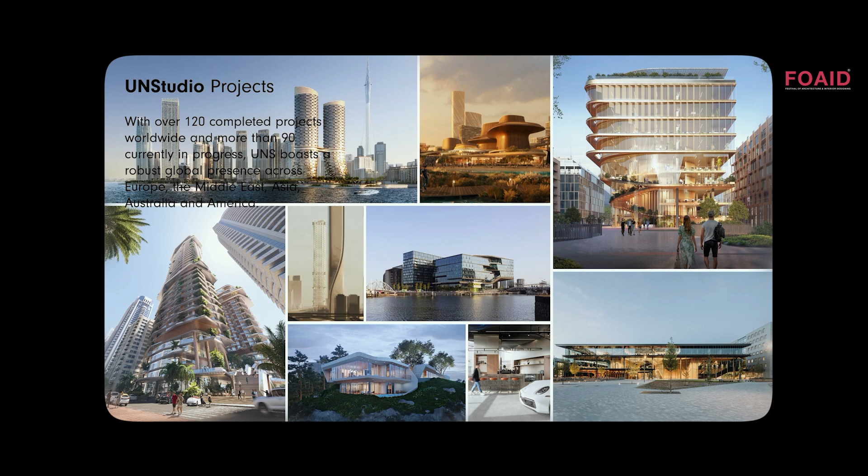We've done a lot of projects all across the world: 120 completed projects and 90 still in the design process or under construction. If you look very quickly, we've only done 4 in India. We hope, of course, that we can do more and collaborate also on the growing cities here, and on the questions which are arising from that.

I think it's good to stand still a little bit on what we think of as values, right? We don't do design for design purpose only. We really think that we carry in our projects, and we have to carry in our projects, our values. First of all, we think that design is about people. And that means for people in different cultures, in different climates, in different environments, that relates really also to the planet itself. So from very desert kind of areas to making a place which is livable for people.

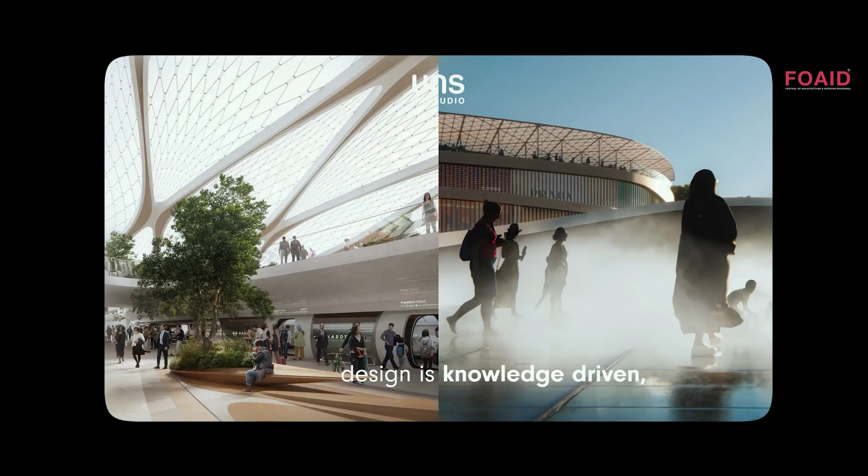Mind you, these 2 images are basically the same location. The right-hand side is, of course, not realized yet, but this is the ambition which we have. We believe that design is knowledge-driven, so that we don't design only the aesthetics, but we really think about what the impact is on the world. On the left-hand side, that's a hyperloop, so we think about the mobility of the future. And on the right-hand side, how do we entertain people, and how can we keep people outside longer - this is actually in the UAE - to extend the winter in the desert areas.

We do that on all scales, from small interventions to cities within cities. On the left-hand side is the Amsterdam project, a very high-end shopping street in Amsterdam with all these old houses which we know from Amsterdam. We were asked to do a small intervention, and we kept it very, very minimal to the detail, so we were very focused during this project on the detailing of this facade. On the other hand, we also do master planning and huge developments, like the one in Frankfurt, which is under construction and almost completed.

And that is on a site which used to be the Deutsche Bank. We wanted to give that back to the city, because it has been closed off for so many years. So now it becomes a kind of center of Frankfurt, where people can just enjoy the city.

We do that on cultural icons, and we question the infrastructure of the future, where cable cars could be a solution for how we can travel on a consistent basis through the city, avoiding traffic. An interesting fact: cable cars are almost like a constant conveyor belt, so people don't really have to wait, it just continues. You can get in, you can get off, and you just go over all the traffic.

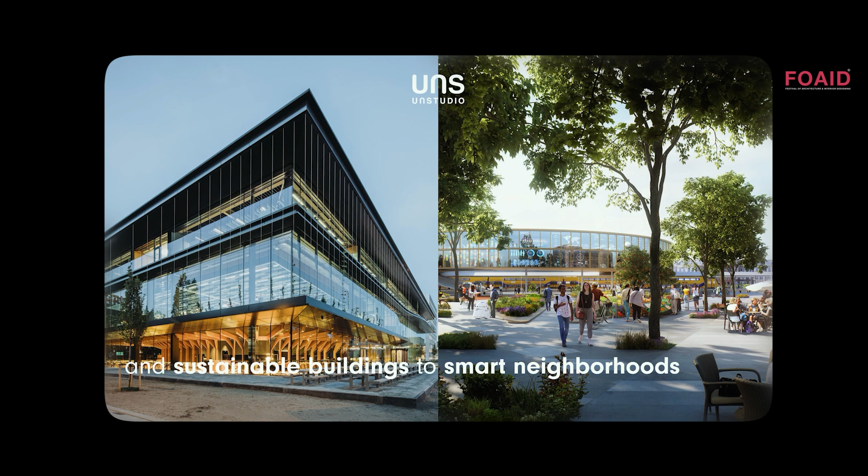We focus very much on sustainability and smart neighborhoods, so we really focus on technology. Interesting fact, the left-hand side image is from my university where I studied in Delft. We designed an inter-faculty building where students can collaborate, so an engineering student together with an architecture student or an aerospace student can come together and share ideas. So the architecture becomes way more than just a building. It becomes a place where people meet, collaborate, and learn from each other.

This building specifically is also very sustainable. It produces more energy itself than it needs, so it could give that back as well. So we create social sustainability as well as environmental sustainability.

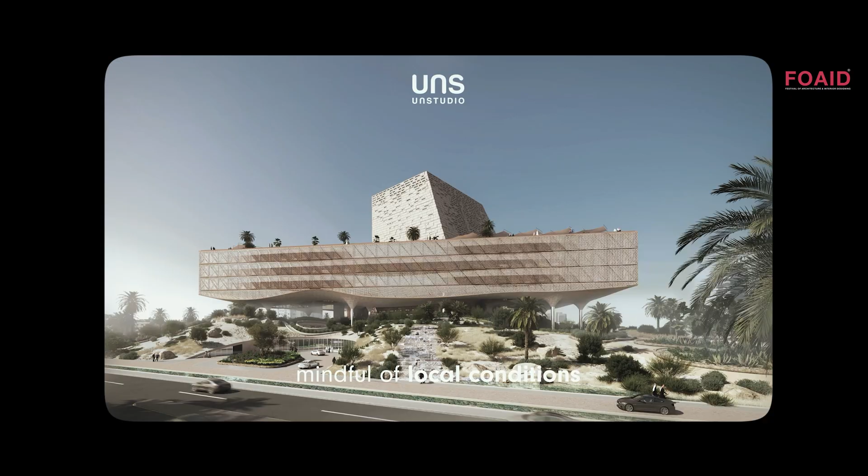We do that with always being mindful of local conditions. That means a building which we design for London is very different than a building which we design in Jeddah. So we make use of the local flora and fauna, and we try to make the environment more pleasant, so you can get under the building into the shade and really extend this 'winter,' which is super important if you live in the Middle East and have experienced the UAE in summer. You really welcome these kind of initiatives.

Obviously, we create meaningful places. I think that's a very important message for us, that we don't say we create meaningful architecture, but we create meaningful places, because that's where we live. We don't live in architecture, we live in places. We entertain in places, we work in places.

Now, getting to the subject. Like I ended, I think we talk about space and how can we make that inclusive, so where everyone's needs and desires are met, and how we as architects, urban planners and designers can make that happen. So we're trying to look for this balancing of the needs of people, neighborhoods, and the environment. We approach the design as community making, and also this future thinking. We cannot predict the future, but we can think the way we foresee the future, and be flexible with it.

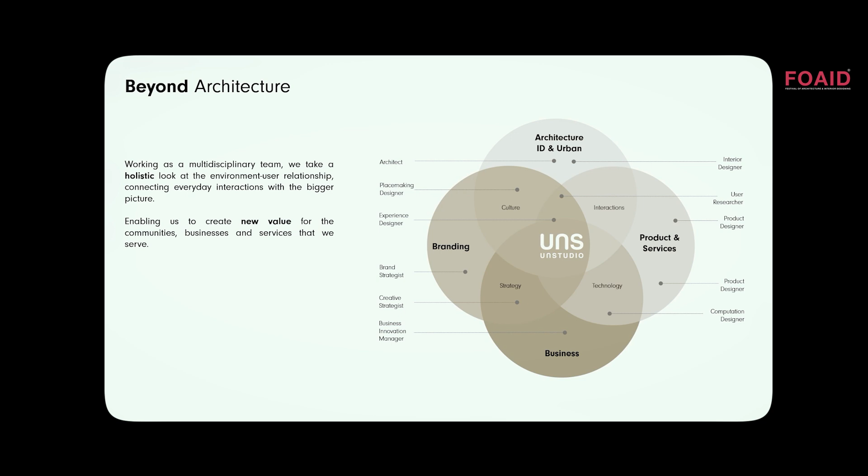And of course, on the side, we do some branding, products and services where we can implement very user-specific and end-user-specific products in our projects as well.

So by exploring how people live, work, move, and interact with communities, nature, and space, we explore how to create these environments and enhance this human experience. We want the end result to always bring people together in their way of living, their way of working, and their way of entertaining.

So I want to show a couple of projects which show not all the elements in every project, but at certain levels in different projects.

I want to start with a project we recently did in Dubai, a very commercially driven development, a high efficiency tower with an ambitious brief inspired by the coral reef. We were inspired by the aesthetics of it, but also the brief in terms of views.

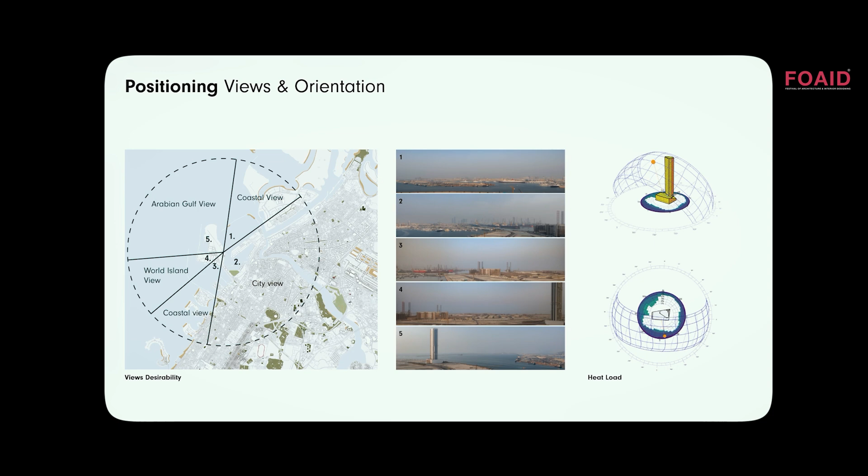This is in the Dubai Maritime City, where on one side it's very industrial, with big ships, containers, and warehouses, and on the other hand, there are beautiful views back to the city and the Arabian Gulf.

So we looked at this from different perspectives: the site itself at a micro level, and also how it's exposed to the sun during the day, and how we could combine those.

We looked at the urban envelope we got, which was just a standard floor plate, basically a podium with a tower on top, a very normal and standard approach to residential.

We focused immediately on the views, since that was the main driver for the developer. We thought, why don't we rotate this building and push the core even further back, so we could really focus on one side, which basically sells the project. That worked out perfectly, because we were then able to put the core on the southern side of the facade, which has the largest heat load.

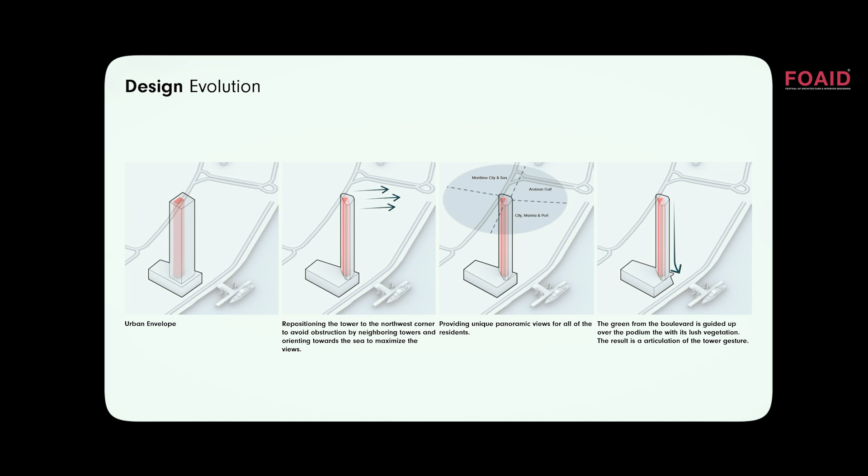We wanted to do a little more with that, where we could use that core to heat water, or even cool water as well. However, the client didn't see the purpose in that, unfortunately. But these kinds of things we always try to introduce, at least.

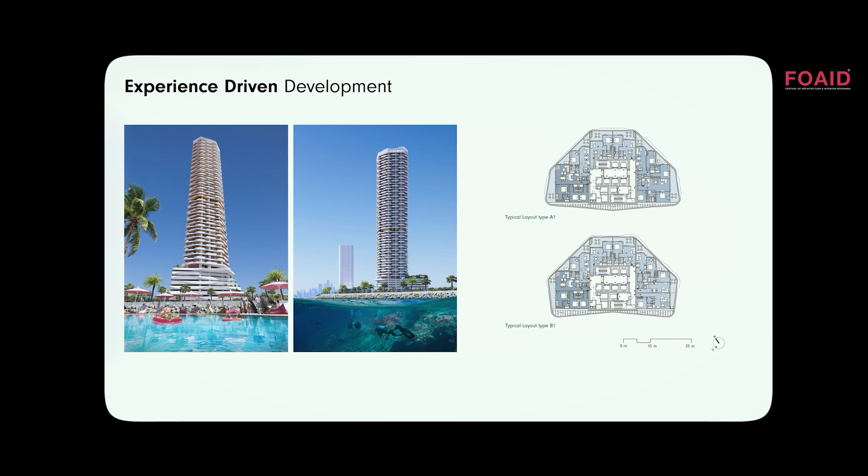And that ended up into a tower which is standing tall. We tried to incorporate the podium as well into the whole design, and as you can see, it's really inspired by coral. You can see in the floor plans that all the living rooms have these beautiful views, while the bedrooms basically turn their back to the more industrial area. Like I said, it was inspired by coral, so it's a kind of natural inspiration.

How did we create this vividness on the facade? It's a very simple A-B approach, an iteration of the A floor and then the B floor, which gives you these double height balconies. So you always have air above you, instead of continuous balconies on every floor.

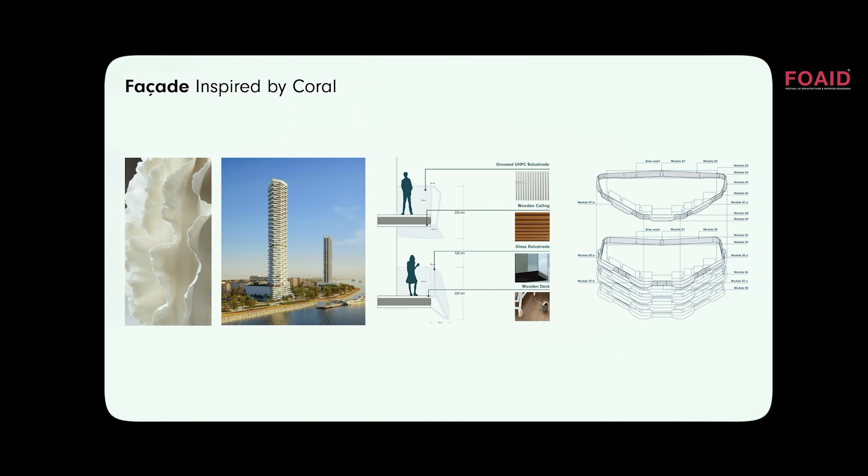Continuing, I think this is one of our projects which is really highly anticipated. It's going on site, hopefully. It's in Melbourne, and this is truly an extension of the urban environment and the public realm. This is Southbank by Beulah in Melbourne.

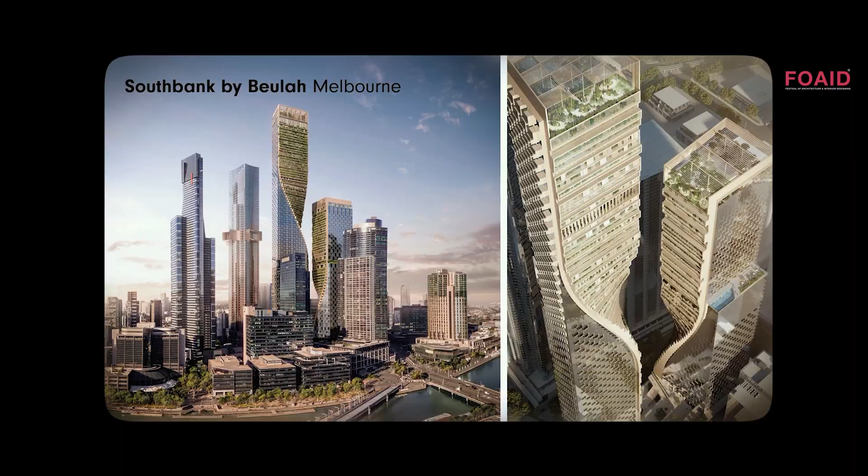We were invited for a competition a couple of years ago to design one tower in Melbourne. It was a big competition with all the big names, and we basically challenged the brief. We said, what if we do two towers instead, you open it up a little bit and they can talk to each other, becoming part of the urban fabric, because you see all these towers with a smaller footprint, and you don't want to create a wall in the city center.

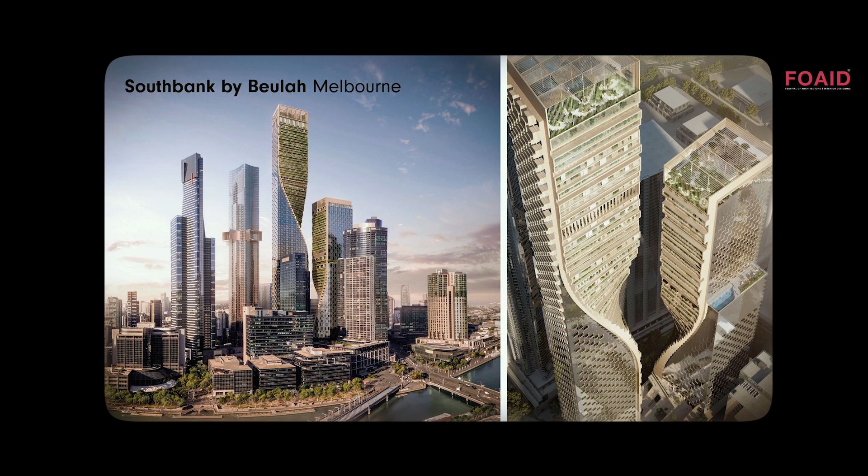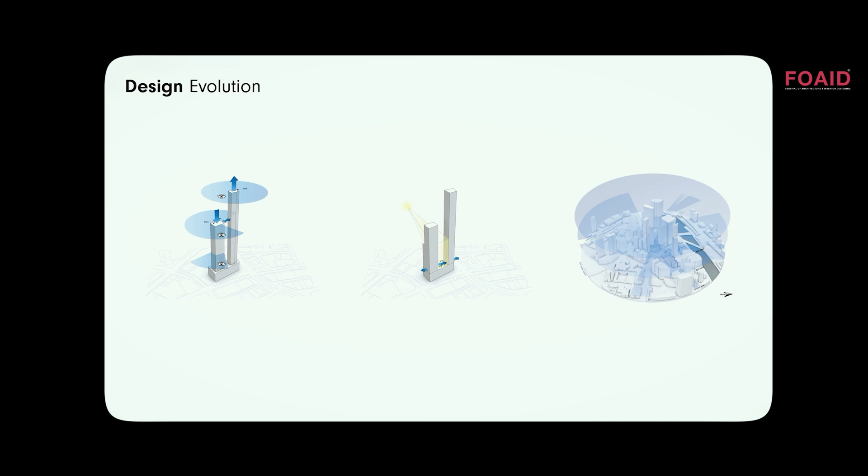So that's actually the first thing we did, analyzing where it's positioned in the city. We focused again on views, sunlight, and how to position it in the city, and how to connect it with the city.

In Melbourne, you have this public realm, a green route through the city connected with different public spaces, communal spaces, bars, restaurants, etc. How can we incorporate that building into that routing and become part of it, so it doesn't stop where you enter the building? That inspired this twist as well, this green spine, and it opened things up a little more, creating a kind of urban podium in the middle. I think this short video really shows what we mean with that, the extension of the green, literally the growing of the green in the city.

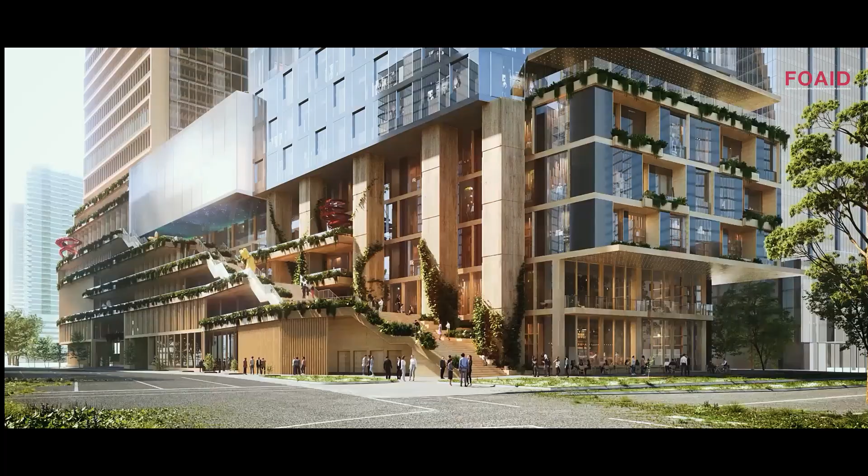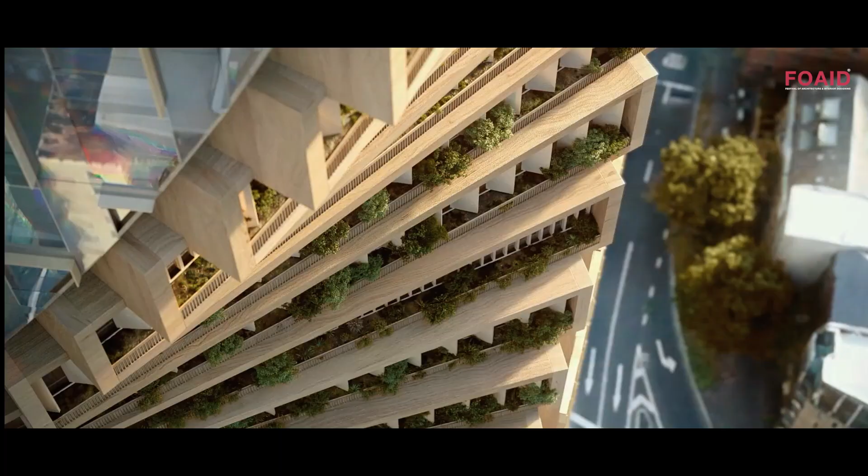So here you can see it's very close to this park, close to the river, and it's really trying to introduce the green spine into the city. Biophilic design is super important, so this whole twist is the green spine, where we try to incorporate a lot of planting, but also the balconies themselves. They're actually loggias, which provide shading for every single apartment, office, or hotel room behind.

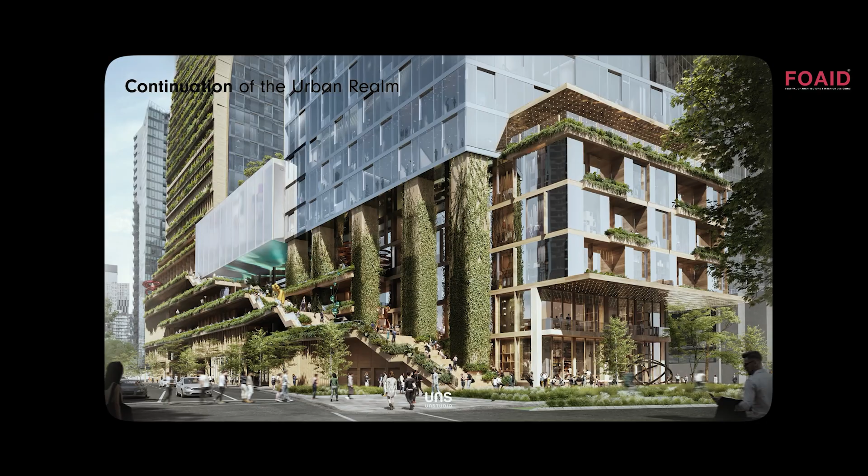So this is kind of the end result. What's interesting is that Centre Pompidou, the museum in Paris, picked this up, how it's really incorporated into the city. That white box there is most likely going to be a museum, so that's almost the highest level you can reach in communal and public space, where we actually show stuff to the city.

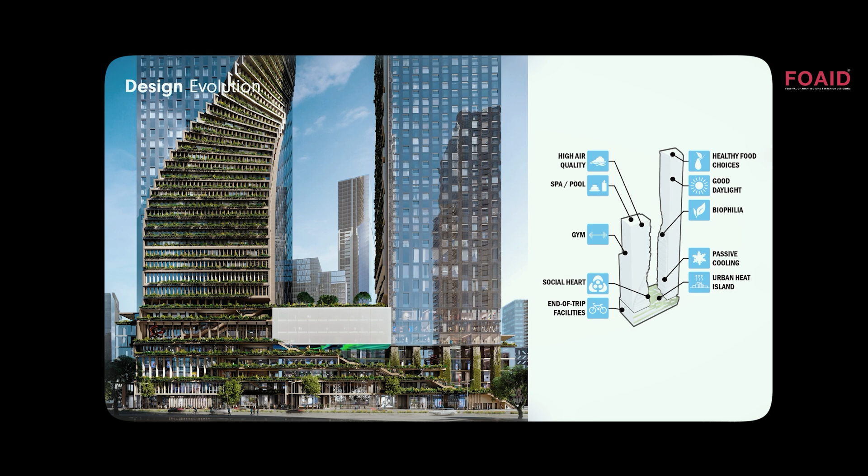Just a few more images to show how this dynamic facade works. It's not like a boring high-rise. It really plays with the different facades, and how it also plays with different elements to introduce environmentally friendly aspects.

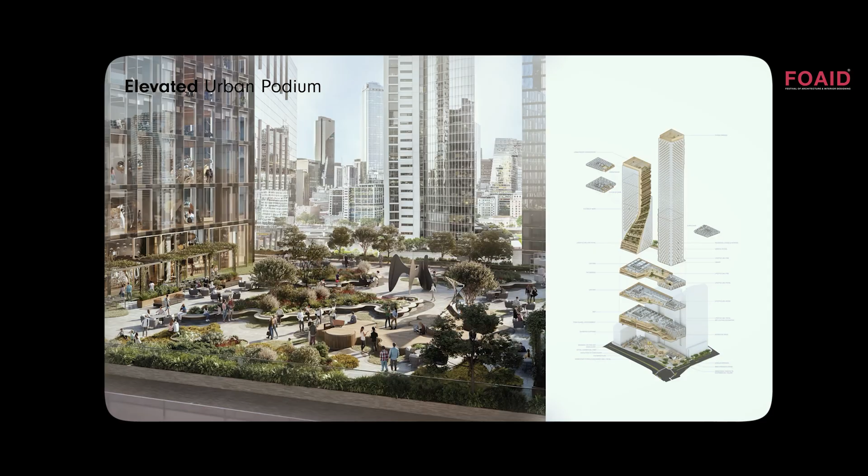Like I said about the urban podium, you create this kind of podium where people can interact and go, and it becomes really like a plaza, as any plaza within the city, only one with a really fantastic view. And we create exquisite experiences. There's going to be a hotel in this building alongside residential offices, so it's going to be a city within a city.

This video is a little bit longer, but it really shows the positioning in the city and how it works with this specific city.

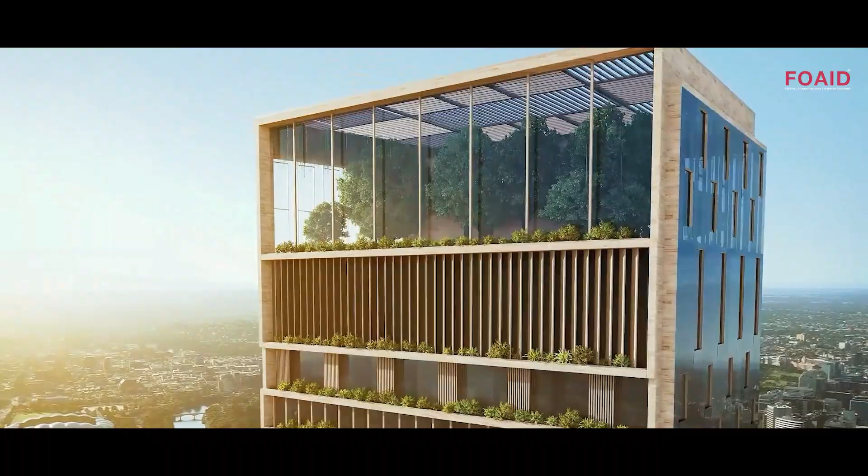As you can see at the top floor, at the roof, we're trying to create this forest. Of course, that comes with a lot of technical challenges. What we've learned is that if you want to make a biophilic facade, you start with very small plants, because they can adapt. If you grow them on the ground floor in a nursery, then plant them at 100 or 200 meters high, it doesn't really work, and it takes a lot more care. So if you already plant them at this height, they get used to it.

I don't know how many times I've seen this video, but it's still amazing, if this gets built in a couple of years, because it will be such an addition and such a new way of thinking about high-rise, and how can we give this back to the city? How can we really make a city livable again, even though it's a very dense place to live? I think we all recognize that in cities like Mumbai as well.

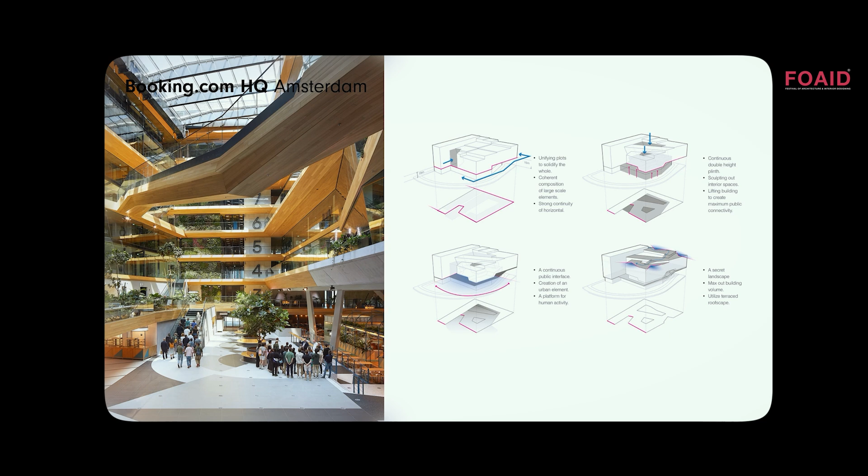What was interesting, I visited obviously, and we walked in and I was like, wow, this is such a big building, especially on the scale of Amsterdam. At a certain point we were on the roof and I said, how did we get here? We didn't take a lift.

It was just like climbing a small hill, let's say. You walk through the city, you have all these experiences. You walk through the restaurant, you grab a bite. There were people meeting, people working, some people just playing a game even in the office. So how can we change this way of working? Work is a social place as well. We spend so much time in our office, how can we make that also a pleasant time?

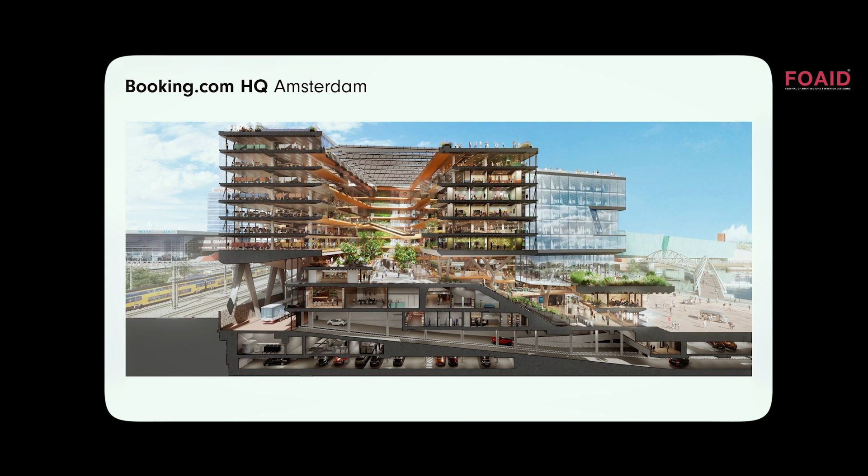This is a section where it actually really shows that it's an extension of the city, with a lot of green, walking paths, big balconies, so that people can really get out of their office space.

And I think it's best shown with a video like this. This was a little excursion into the office. This is Amsterdam on a good day - it's quite often raining.

So this is basically your entrance into the building. It doesn't feel like an office, it feels like an open lobby space. There's a lot of green introduced, very warm tones, wood, timber.

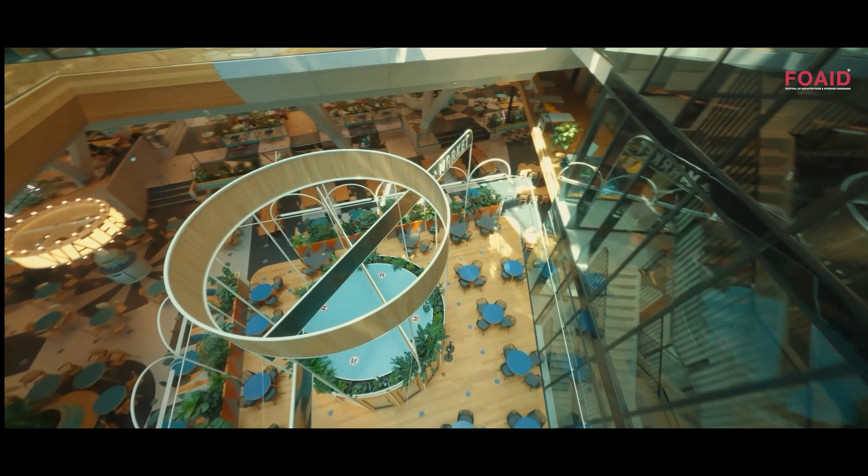So can you imagine working here on a daily basis? Good restaurants. And it's these moments, especially in these technology-driven companies, where the biggest ideas happen and people interact - not when they're behind their laptop writing emails or writing reports.

It's also very special - we looked really into the air quality of this building. There are very special kinds of ways of treating the air from either the floor or the ceiling, which gives you this really purified air almost. So the environment not only looks good, it is also good for you.

This is the rooftop I talked about, and here you can see really, really good the scale of this building. Especially in a city like Amsterdam, where everything is very, very small scale, it's quite interesting how it blends in.

Yet another project - I think this really wants to address the fact that we don't only focus on design. We developed an urban branding manual. We did it for two projects so far.

We did it once in Qatar for the metro network, where we really made a branding manual of how to build a metro station on different scales. We did that because there were 36 stations, I believe, and these were all going to be built by different contractors. So how can you maintain the quality? Well, make a manual - and it's not guidelines, it's literally a manual which has to be followed.

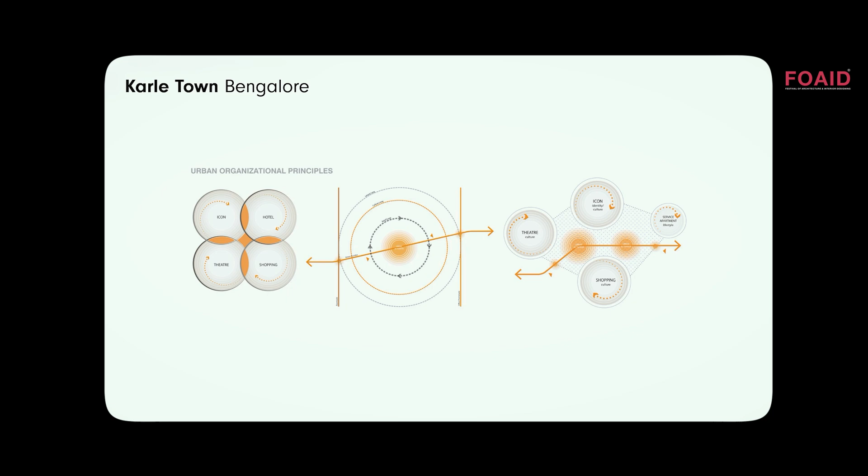The health aspect, or how we connect all these buildings together, isn't about separate elements. We try to create a field almost, where you interact as a human being with those buildings and your environment, having a pleasant environment. We want to avoid people clocking out at 6 o'clock and going straight into traffic.

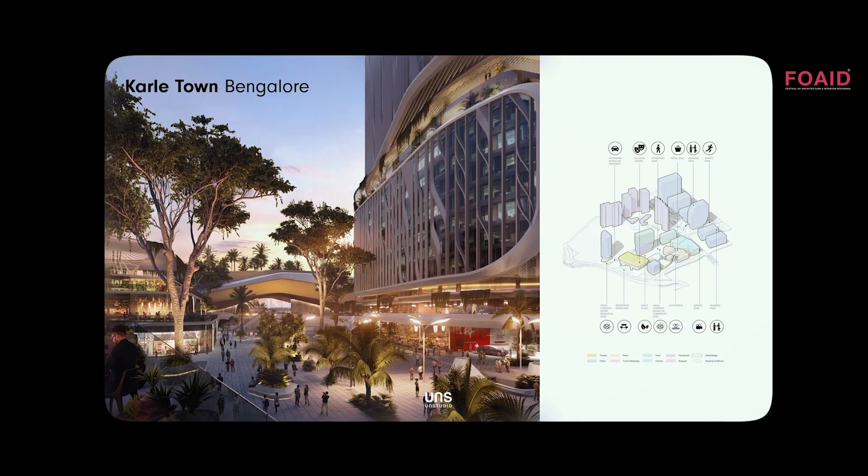Why not make the environment so good that you can invite your family in, have dinner there, entertain, stay a little longer, and then drive back home? This extends the use of the office park and lets you connect with your family at a high quality level. So we introduce elements like cinema, entertainment, hotels, hospitality, and F&B, to really make this a city within the city where people can enjoy both working and living.

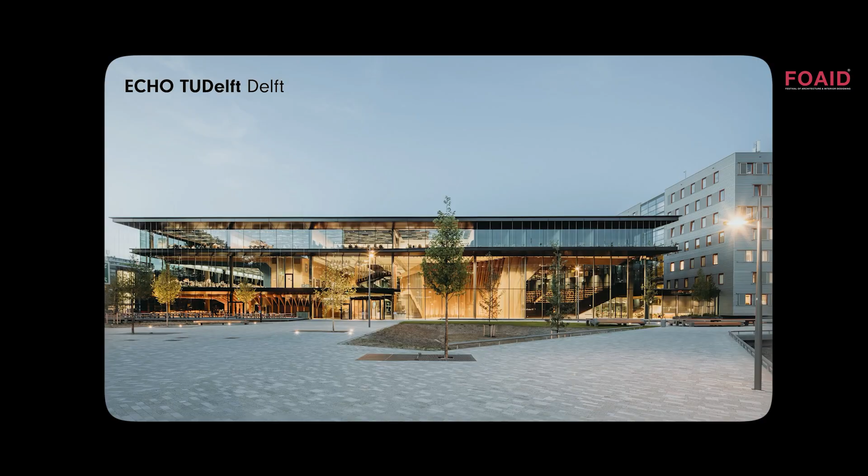Sustainability is super important, as I addressed earlier. This is ECHO in Delft, and it goes beyond just sustainability as a buzzword. It goes into every single detail of how to make an actually sustainable building. It produces more energy than it needs, but it's also a building that's very smart in how it's built. First of all, daylight, of course.

This is in the Netherlands, so it's very transparent, with a lot of natural light coming in. There's also this central staircase, which is what you see when you come in, so you're almost invited not to take the lift but take the staircase instead, which is good for your physical health. So it's this kind of sustainability on different levels.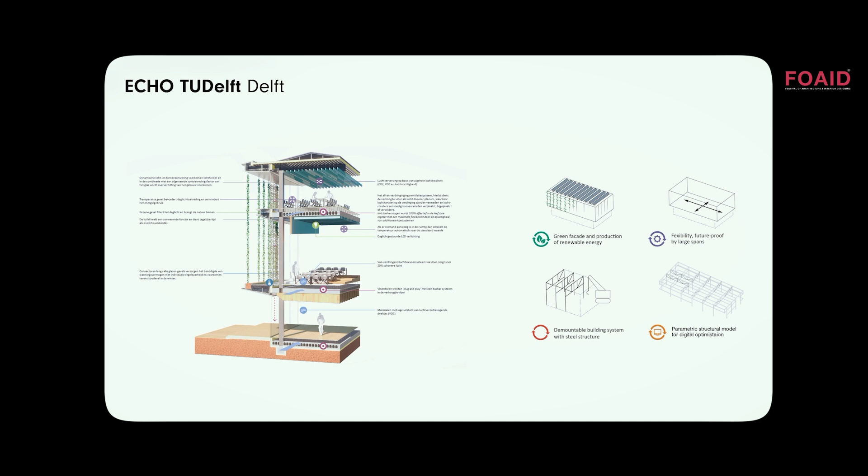Also, the building is completely demountable, so we can reuse the materials if they ever want to replace or rebuild it somewhere else. These are the construction technologies we looked into together with the contractor and our specialized in-house team, figuring out how we can actually reuse this building.

The facade is also sustainable — there are natural plants growing on threads, giving a view of green, but also providing shading when needed.

Now, the crown jewel we're working on now — I'm based in Dubai, so I see this tower daily, and I've worked on it personally. It's almost completed now, this is Wasl Tower, a tribute to the city of Dubai and its dynamics, but also focusing on sustainability, health, and innovation in the use of materials. This is a render probably done 10 years ago — that's how long a really good project can take. We've tried to bring cultural sustainability, health, and innovation to the next level.

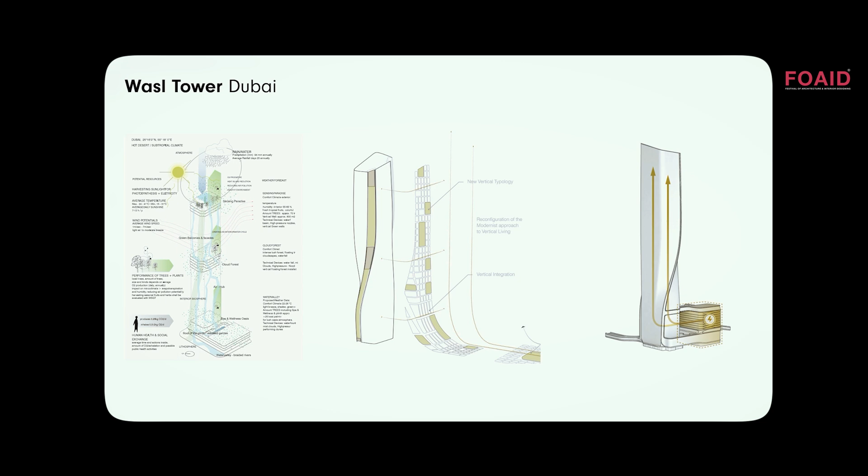But also the car park building acts as a battery pack, which provides enough energy to power the facade lighting.

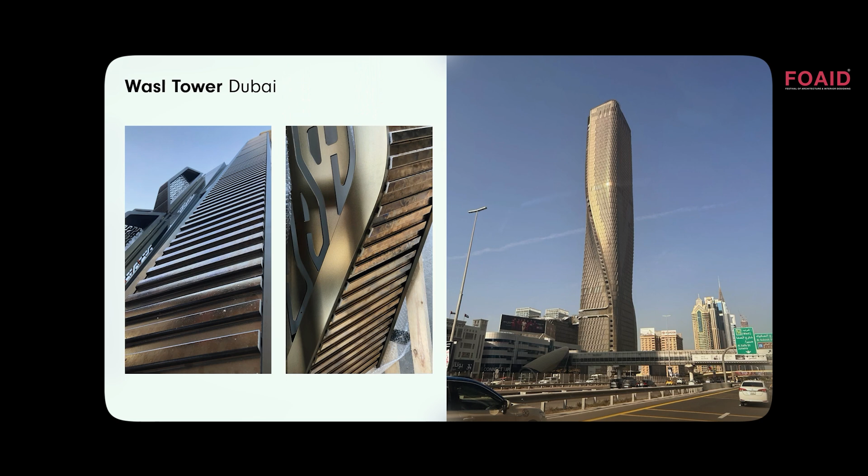Unfortunately, these were value engineered out, but it's not that we cannot reintroduce them at a certain point in the future. I think the most innovative aspect of this tower is the ceramic facade, where first we have the shading elements to reduce the heat load on the facade, and then the ceramics, which are really good at dispersing heat, not only give it a very beautiful aesthetic effect with this pearlescent, almost oil-like and pearl-like finish, but also help reduce the heat load even further. And of course it adds to the dynamics when the sun reflects in different ways on the building.

This is again best represented in a video. This is from a couple of months ago, maybe a year already, where now the facade is completed to the top. It just needs a really good cleaning.

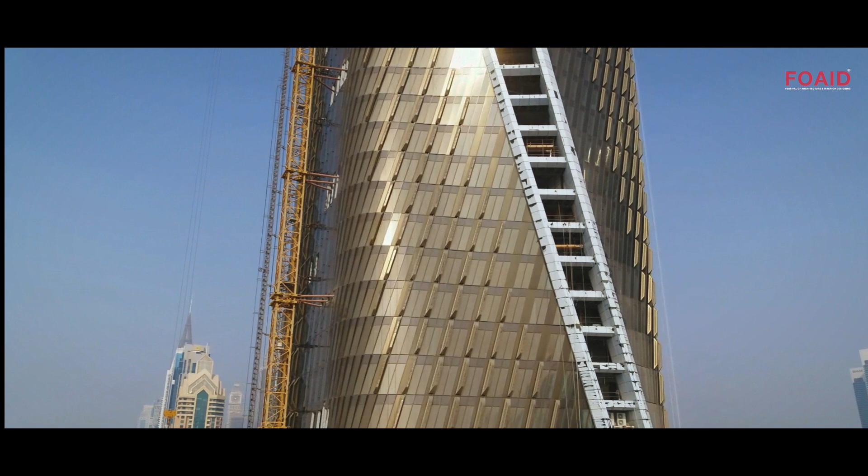Here you can see the reflection of this facade, because of that curvature — it really is, like Ben van Berkel, the founder of UNStudio, said when he visited two weeks ago, this is a building with 1,000 facades. And he is absolutely right, because every moment of the day, every angle you look at it, it's always different, with different aspects. Sometimes it looks really dark, sometimes it looks pure gold. This is amazing about this facade.

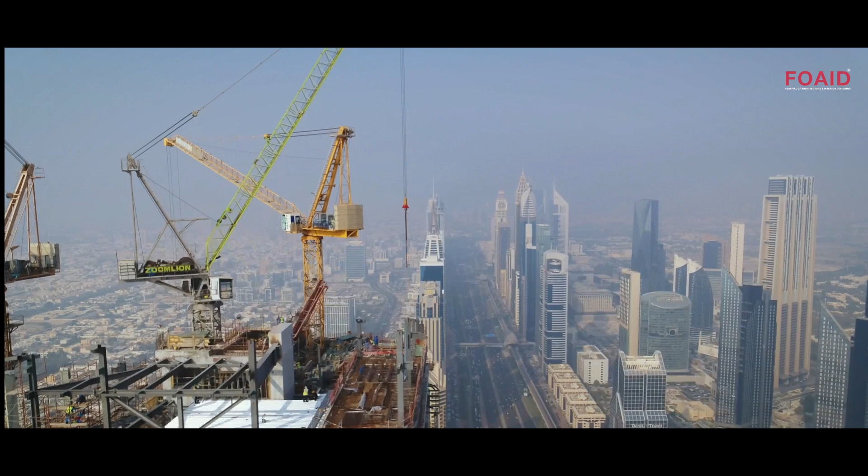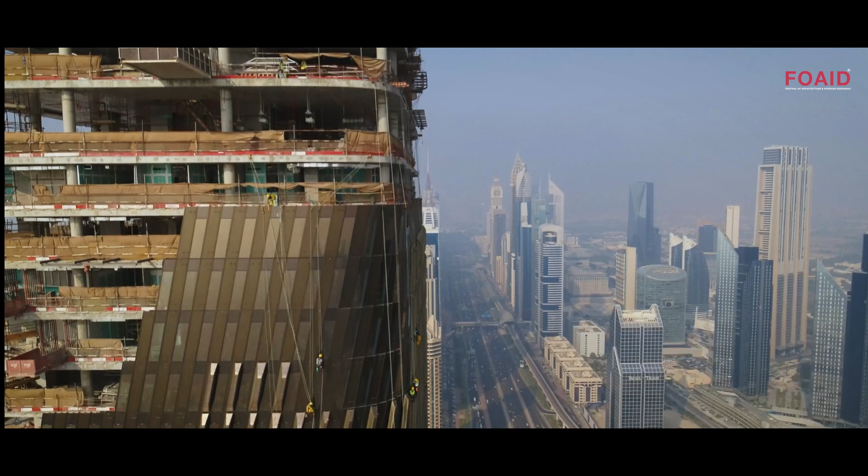We introduced very limited glazing, actually, because why would you build a fully glazed building in an environment where temperatures can rise to 50 degrees, right? All the heat you let in, you need to cool down. So that's a double effect of heat load on the facade, and you have to cool it. So this is really treating the facade with information we get from analysis, where we can use more glass, we do, and if we don't have to, we don't.

So here you can see this effect actually, and of course it's all a little bit on an angle to create a dynamic aspect as well.

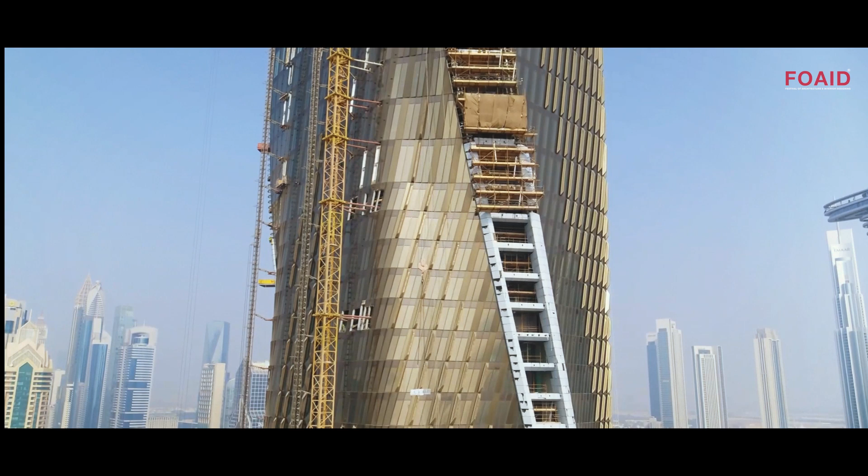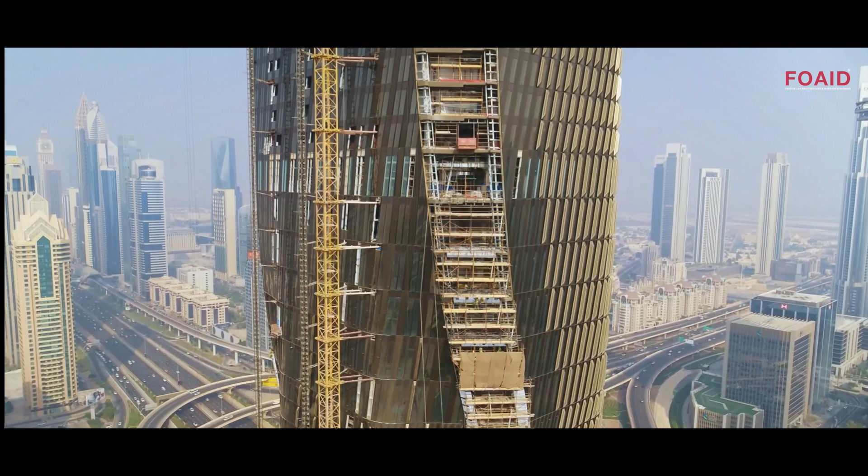An interesting part of this building is that the Sheikh Zayed Road development is a tower, and on the back side is the car park. The car park is usually only a car park, with exceptions when a pool deck sits on top. We took it to the next level — we connected the car park with the tower, and since it's a hotel, Mandarin Oriental, it has a ballroom, which we placed in the car park building, because it's much easier to build a column-free, big space in a smaller, low-rise building than in a tower, which has a lot of structure and less flexibility.

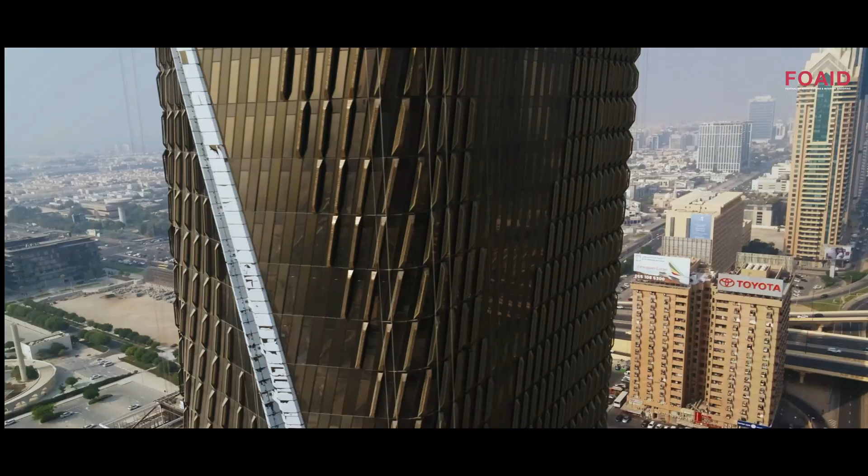And we believe that works. So it's really worth a visit if you're in Dubai — I think it will open sometime next year. Even the garden between the car parking building and the tower is where we really start to see how the building can give back to the city as well.

So almost concluding my presentation — and I think I just had a conversation as well about what's next. We see a lot of challenges now, but also more happening in the future, and we believe we have to work in a different way. We have to collaborate more, approach our projects from a cultural aspect as well, and really look at an intelligent way of designing our buildings. How can we use less concrete? How can we use more information? How can we listen to people, how they want to live, how they want to work? I think this data is really important to create a more innovative and creative way of design, and make our buildings, cities, and places really work for the people and the environment. Thank you very much.